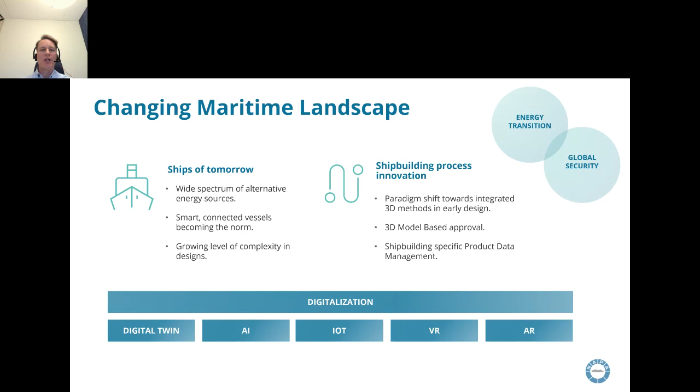While there are possibilities, there's also challenges. First of all, shipbuilding is a time-critical business where design activities are part of the lead time of manufacturing of each product. So it's so-called engineered to order type of a business. So there's a need to achieve optimal design within a short delivery time. And multidisciplinary design and concurrent engineering is creating challenges of its own. And in this space, later phase design changes can be expensive to fix during the manufacturing phase.

If we talk a little bit about the data management, still today many of the systems are non-integrated, and that hinders collaboration, data flows, and total design optimizations. At the same time, this can lead to inconsistencies between different software systems on the design data that can lead to errors, delays, and increased costs. So data-driven decision making is not yet fully achieved.

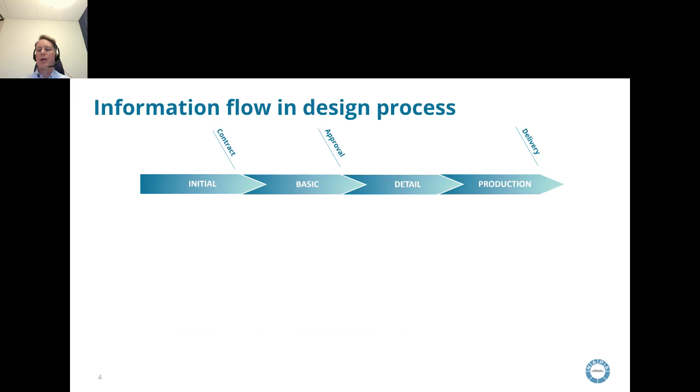Let's go a little bit into details about these challenges, and I'm using now a very generalized and simplified representation of a design process to illustrate some of the challenges with the information flow. 2D drawings, they are used today to large extent to represent, share, and manage design information, and I think there is a good reason for that. Drawings offer often the needed information at glance, and the production of 2D design information is easy to scale, distribute, and predict. At the same time, various 3D models are being used to represent the same design information which is in the 2D drawings, while different data management solutions are being used to capture and organize the essential information to serve the overall project execution.

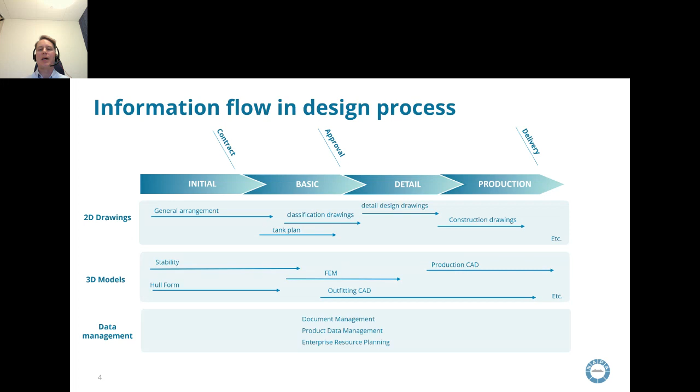One challenge is that there are disconnections between data flows, between systems, between 2D and 3D, between 3D and data management, and this means that the design information needs to be manually duplicated and replicated in many systems, and that is creating inefficiencies and possible errors and duplicated data. And when this is multiplied throughout the process, it can be a real inefficiency.

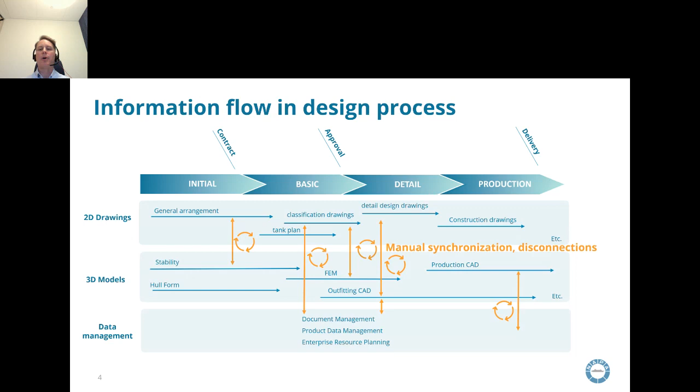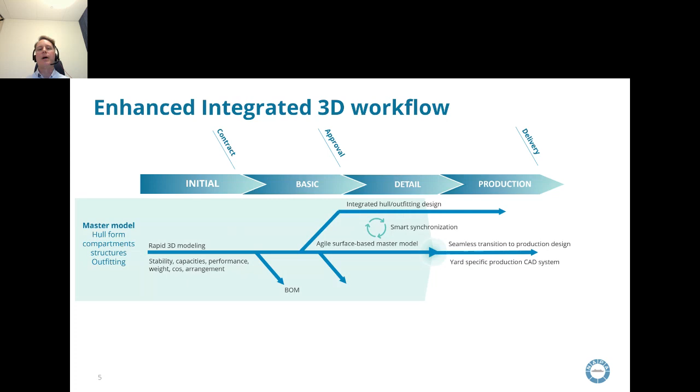Okay, let's take another look of our simplified generalized design process, this time applying the concept of so-called integrated 3D workflow, what we have been here at NAPA very much studying and exploring. In the integrated 3D workflow, so-called master model can be used as a main branch of the process. And this master model is used to design the key vessel characteristics in the initial design phase, such as stability, capacities, performance, arrangement, and so on. But this same model can actually carry the design information all the way to basic design phase to handle the approval and all the way to detailed design. And through seamless integrations, it's possible to continue in production design using the same master data.

The information and data from the master model can be connected to your choice of data management solution to serve design revision, collaboration, and early phase production planning. 2D drawings are, of course, still a very important piece of assets during the design process, and utilizing this enhanced integrated 3D flow, 2D drawings can be extracted anytime from the master model while maintaining the connection to the master data. This is now, of course, a very idealized and high-level general representation, but let's dive next to

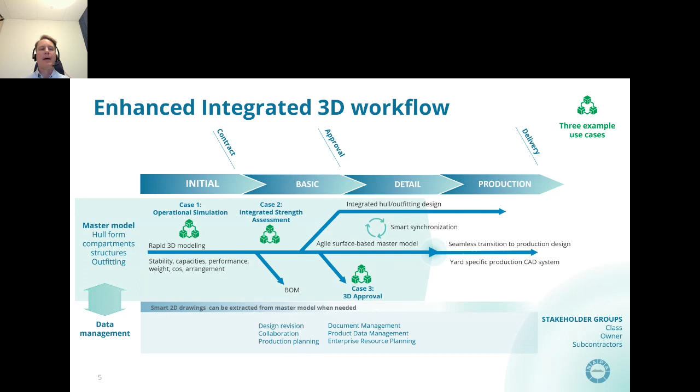three different example use cases of integrated 3D workflow. The first one is called operational simulation. And if we think about how to future-proof the design in the current market environment, it's an important question to understand the carbon emissions throughout the life cycle of the asset. This is a tricky question because there is a wide spectrum of energy configurations to choose from.

There are different types of energy appliances like wind propulsion, which you can take advantage of, and there are different types of indicators to calculate the carbon rating of the design or the vessel during the operation. And at the same time, of course, while making the design, you need to still ensure that your stability margins are within the range. The design is safe. For example, some fuels are really toxic, and how about the capacities? The energy density of alternative fuels can be much lower than conventional fuels, and so on and so on.

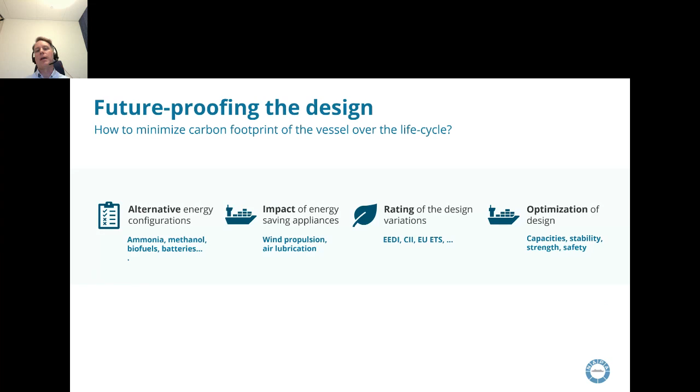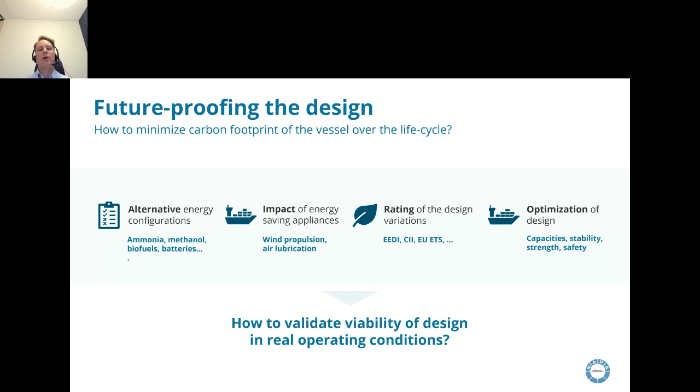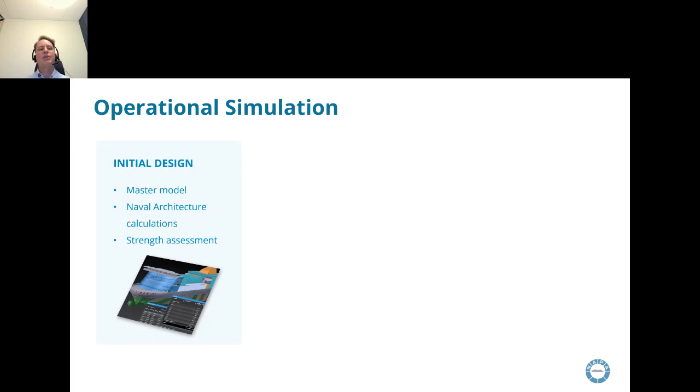So, how to validate the viability of design over the life cycle in real operating conditions? Well, one promising concept is now operational simulation. So when we take the initial design space and we utilize this integrated 3D workflow, master model, naval architecture calculations, and strength assessment, and couple that with operational data, historical voyage data of the existing world fleet, together with the hindcast weather data and route optimization, we can actually simulate operating conditions in design.

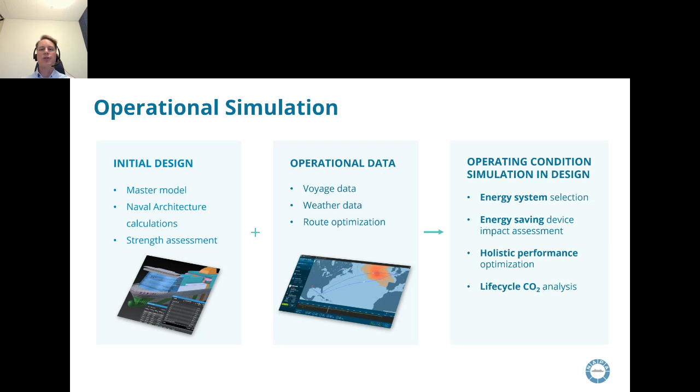And this can provide valuable insights to support the decision making in energy system selection, to analyze the impact of energy saving devices, to conduct the holistic performance optimization, and to understand the life cycle CO2 emissions. In this particular case study, the objective was to study two alternative fuel designs of bulk carrier for iron ore trade between Brazil and China. And the consideration was especially the fuel tank sizing and the implications of that.

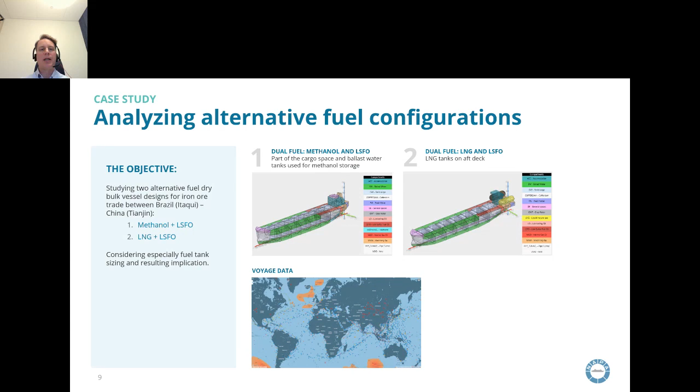The first alternative was methanol and LSFO fueled, where part of the cargo space and ballast water tanks were used for the methanol storage. And the second design alternative was LNG and LSFO powered, where the LNG tanks were located on top of the aft deck. And real voyage data was used in this study to analyze the configurations. The insights of this kind of study can reveal the following items. First of all, it was interesting to compare the operating mode distribution of these alternative designs against similar ships on the same trade pattern.

And this study revealed important information that helped with tank and engine sizing based on simulated voyages in actual weather conditions. And it's possible to use the data from this kind of study to estimate the carbon rating of each design variation on a simulated operating profile. And while doing all this, of course, the basic naval architectural aspects could be handled at the same time, like stability, margins, and capacities, and overall arrangement of your design.

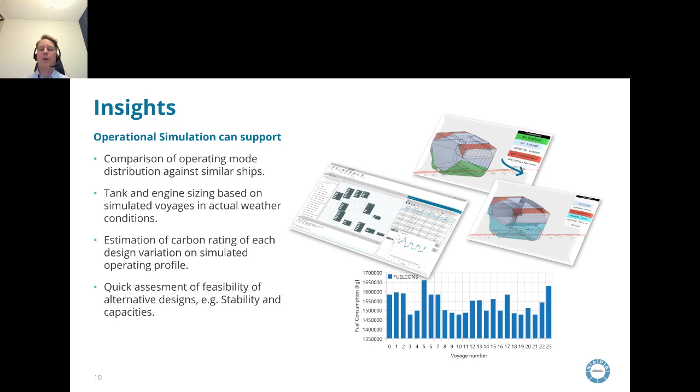Next, I would like to talk a little bit about integrated strength assessment. And here let's take an example case of a strength assessment of a medium-sized tanker. If we look at the conventional strength assessment of this type of vessel, it can mean anything between 1 to 2 months in calendar time. And basically the process is such that from the initial design phase, the information is used to create some initial structural drawings so that the prescriptive rule checks can be calculated either by utilizing class software or perhaps Excel spreadsheets.

And after that, a finite element model can be created for direct strength assessment according to the common structural rules. And this is actually the most time-consuming part of the process. And after that, drawings can be updated, and the hull structure weight can be estimated from the drawings. But there are some challenges here. First one is the time limitation. It's challenging to optimize the hull weight during a very limited time slot available in this initial design phase. And the estimation method of hull weight is typically relying, therefore, on statistical and historical data. And actually, a large amount of the time is going here to select reasonable scantlings that fulfill the requirements.

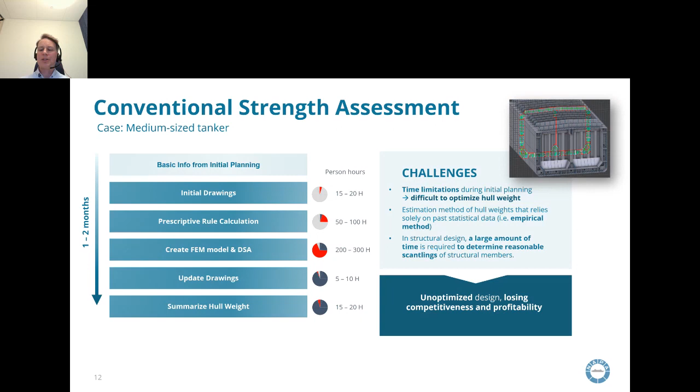If we now look at the same process by applying this integrated strength assessment approach, we can first of all start the process by utilizing our master 3D model. So the compartment model from the initial design phase can be taken as a basis where we can apply automatic structure modeling using parametric methods. And when we apply parametric methods for the model creation, that actually enables quick design changes. It enables design optimization and so on.

So using this automatically generated parametric structure model that is connected to the master model, it's possible to quickly run finite element meshing, set the load and boundary conditions, conduct the finite element analysis, and optimize and iterate this so that the results satisfy the requirements. After that, the buckling calculation can be conducted again using the same model. And weight is of course something that comes automatically out of the 3D model for each and every design variation. So a precise weight estimate is always at hand. And this whole process can be run in a loop that can help to find the most optimal configuration.

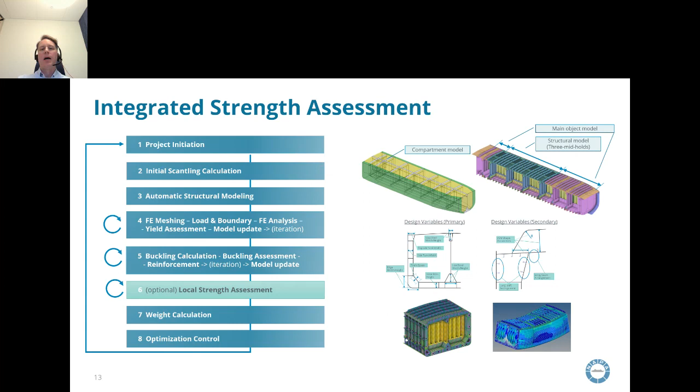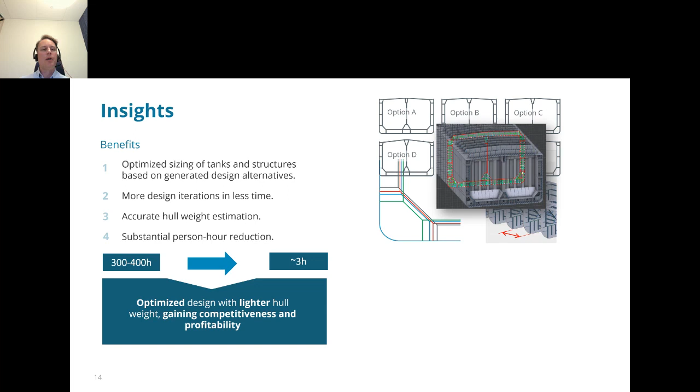Some benefits of this process are that it's possible to find optimized sizing of tanks and structures based on these automatically generated design alternatives. So basically in less time, it's possible to analyze and study more design iterations and have accurate hull weight estimation for each variation. Also, the outcome was that there was a substantial person-hour reduction after the process was set up, thanks to this automated and parametric approach. So all in all, this approach can help to achieve optimized design with lighter hull weight that can increase competitive edge.

A few notes about this type of approach. This particular example is about a fully automated process, and there is certain initial effort of developing and setting up this type of process. It depends, for example, on what ship type you're dealing with, what class society is in question, and so on. But also a so-called midway solution using off-the-shelf tools, minimal cost customization, minimal configuration can provide significant benefits versus the conventional method. So if you just couple 3D CAD with automatic FE meshing, there's already one area to make gains, or coupling 3D CAD with class society prescriptive rule checks.

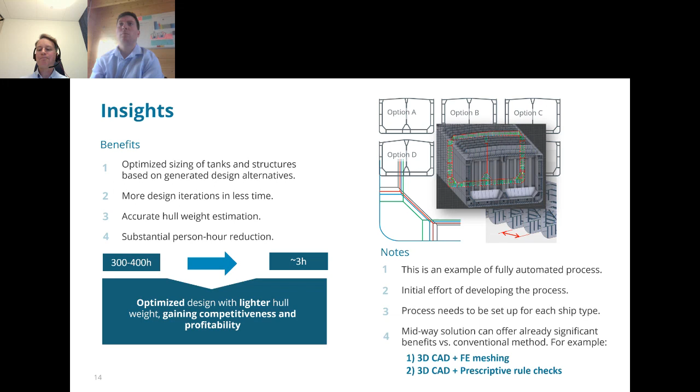Then let's talk about the third case, and that's 3D model-based approval. 3D model-based approval in a nutshell is a concept of utilizing 3D models for conducting class approval of hull structures.

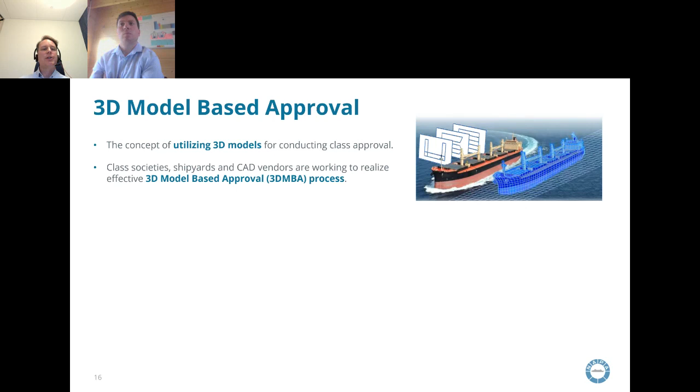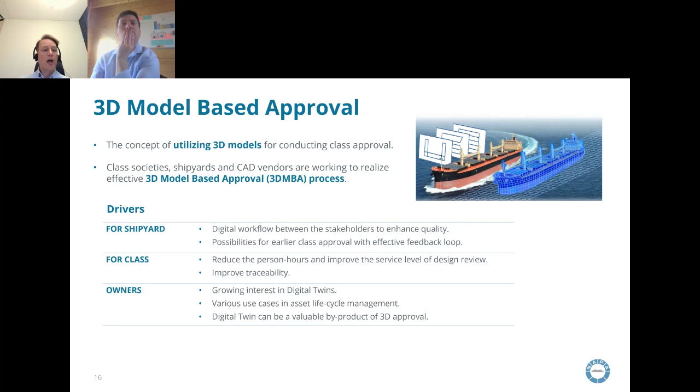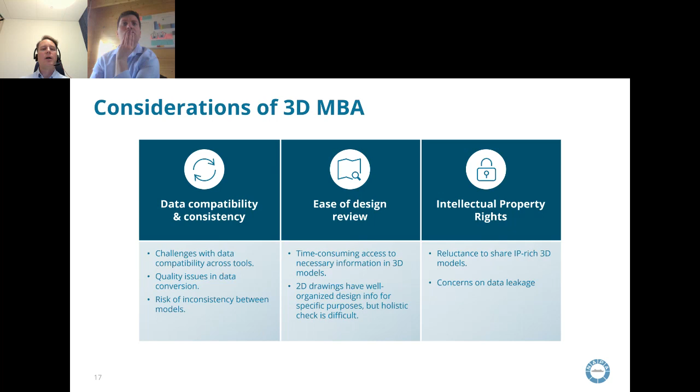I'll try to speed up. At the moment, class societies, shipyards, and CAD vendors are working to realize an effective 3D model-based approval process. There are different drivers for different stakeholders to go into 3D approval, but there are still some considerations like data compatibility and consistency, how to easily manage design review, and how to maintain IP protection.

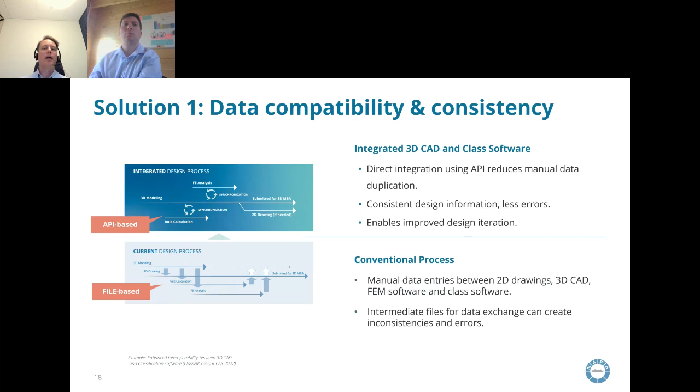If we look at data compatibility and consistency, in a conventional process there are manual data entries between 2D drawings, 3D CAD, FEM software, and class software, and intermediate files are used for data exchange, and that can create inconsistencies and errors. But this integrated process using 3D CAD and class software together through API integration can solve this. The second one is ease of design review. Again, using the master model, it's possible to handle real-time communication between designer and class through efficient commenting tools and informative 2D/3D hybrid representation of the design information and model.

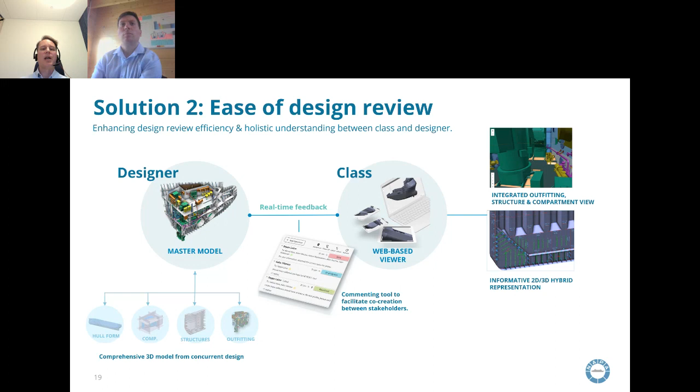The third solution here is to ensure IP protection, and there is technology available that enables collaboration across stakeholders without a risk of losing the data to unwanted parties. So encryption technologies and web-based viewer technologies, where the data is hosted at the shipyard, who can control the access rights, can manage and solve this challenge.

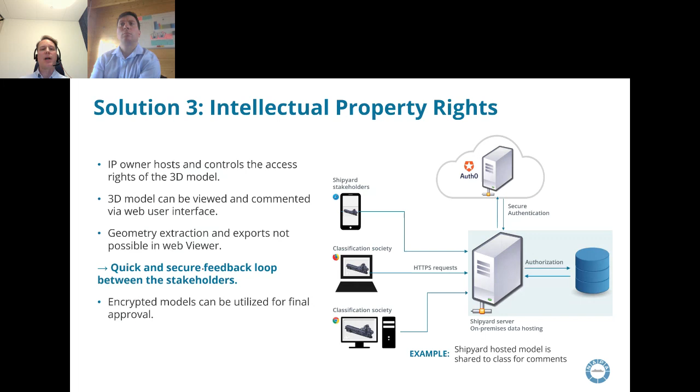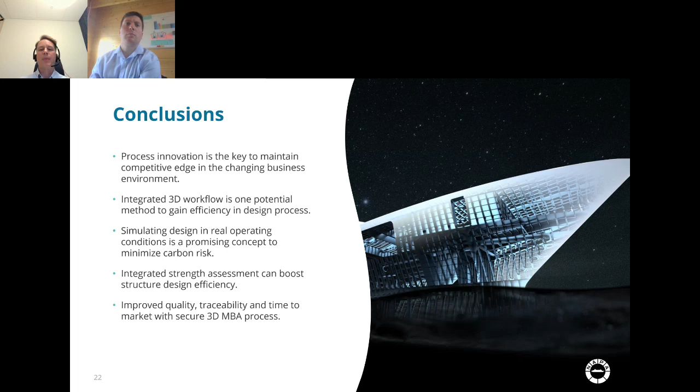Then let's go into conclusions. We discussed process innovation and how that is the key to maintaining competitive edge in the changing business environment. And integrated 3D workflow is one potential method to gain efficiency in the design process. We covered three different use cases. The first one was operational simulation, a promising concept to minimize carbon risk. The second one was integrated strength assessment and 3D CAD, which can substantially boost structure design efficiency. And finally, we touched on the 3D MBA process. It is possible to improve quality, traceability, and time to market with a secure 3D model-based approval process. Thank you very much for your attention.

Thank you very much. Great presentation, and I fully buy in and agree with the concept of reducing the interactions between models, because that always is the biggest time sink in the design process. One very quick question, if I may. You hinted at it through your presentation, but do you reckon it's feasible to have one single all-purpose 3D model throughout those different stages, so that you can have one central point of knowledge?

I think that's a fair question, and it really depends on your current starting point, your CAD system setup, what type of vessels and projects you are dealing with, and my advice is to identify the bottlenecks and inefficiencies, and then try to utilize this master model concept for those areas first. That's where you can make the most gains with reasonable effort.